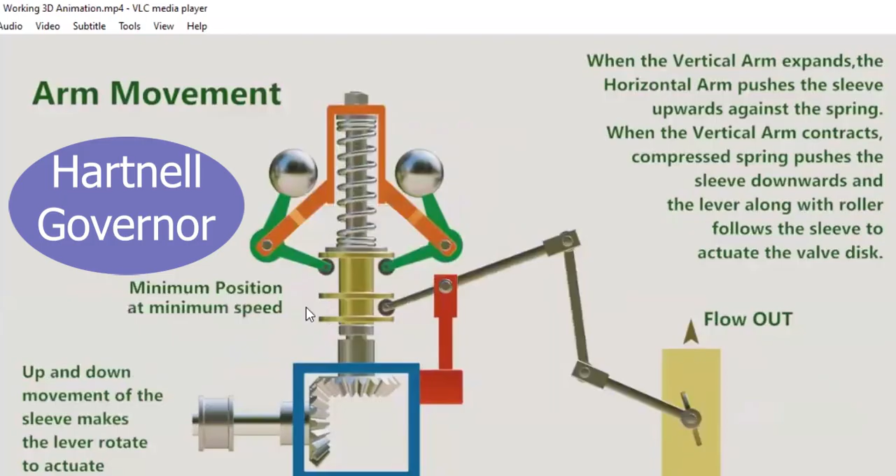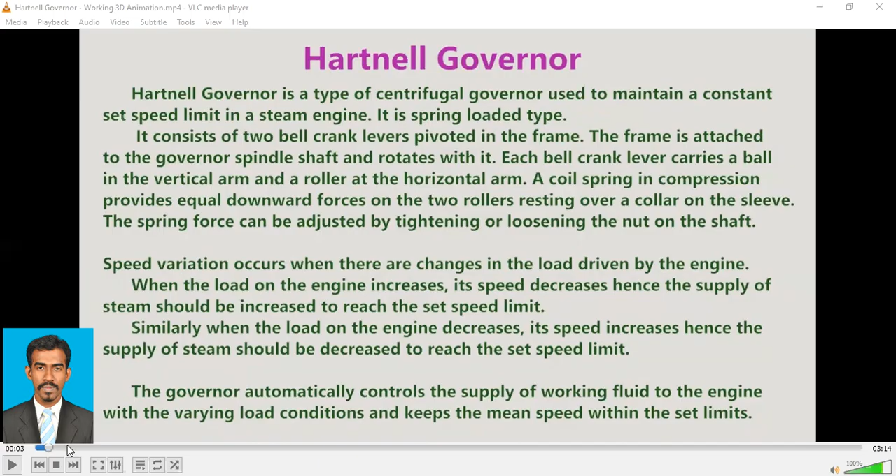This is the Hartnell Governor. It is a spring-loaded type governor. There are two types of governors: one is spring controlled and the other is a dead weight governor. The Hartnell Governor is a spring controlled governor, as you can see there is a spring here, which is why it is called a spring controlled governor.

In this picture we can see the parts of the Hartnell Governor. Here is the frame, this entire part is the frame. Here is the fly ball. These two are the fly balls which will fly outward with increase or decrease of speed. Here is the vertical arm, since it's vertical, and here is the horizontal arm, and here is the pivot.

So imagine what will happen when it moves up, this will come like this. When it moves down, this will come like this. We are going to see it in animated motion. And the roller, these rollers are allowed to move within this region because it needs to move so that it can function.

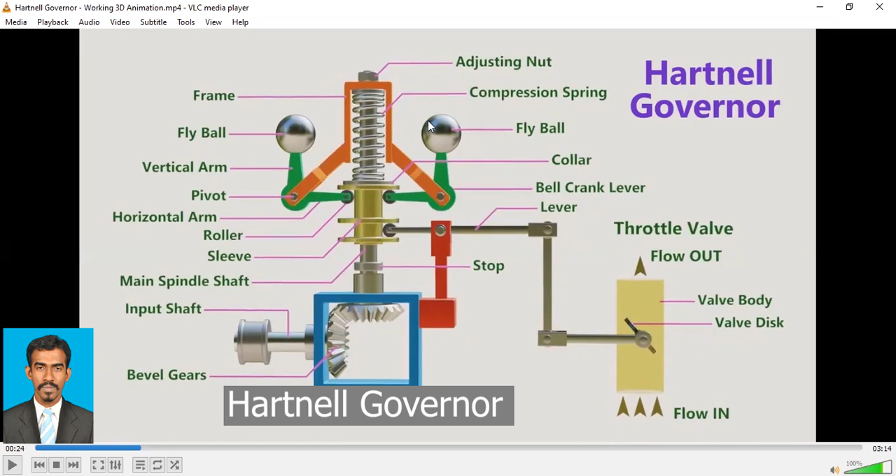Here is the sleeve, this is the sleeve, and this is the main spindle shaft. So this complete assembly will rotate on this main shaft. And this is the input shaft, which is connected to the engine.

Here are the bevel gears. The input shaft, which is connected to the bevel gears, will rotate this assembly. And this is the collar. Here we have a bell crank lever, and this lever is connected to the throttle valve. So the working fluid supply comes in here and goes out here, and based on the motion of this mechanism, this will either open or close to regulate the flow of the working fluid.

There you can see how this functions. When this complete assembly rotates, either this may contract like this or this may expand like this. So this is all the motion of this Hartnell governor. The up and down movement of the sleeve makes the lever rotate to actuate the valve disc, so you can see the motion here will allow this to control that. And here is the maximum position, and this is the mean position.

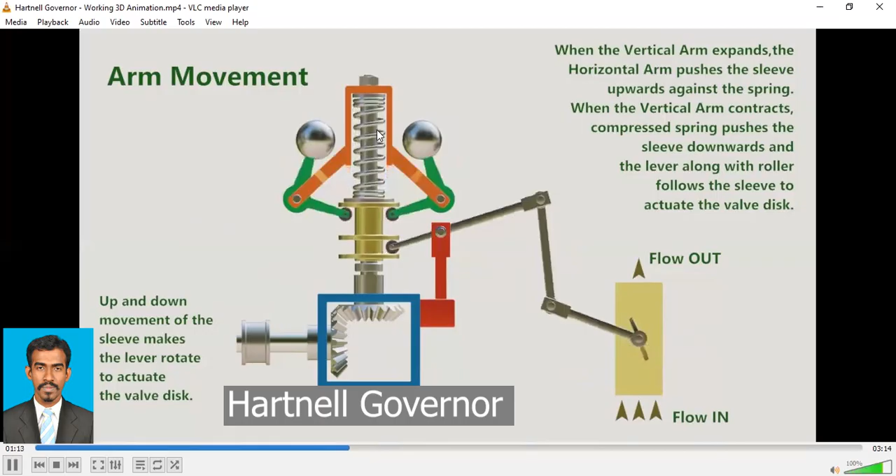And this is the minimum position. So this range between the minimum position and maximum position is controlled by this spring, you can see. This spring is contracted now, now it's a little bit expanded, and when it comes down, it's completely expanded. That's why it is called a spring controlled governor.

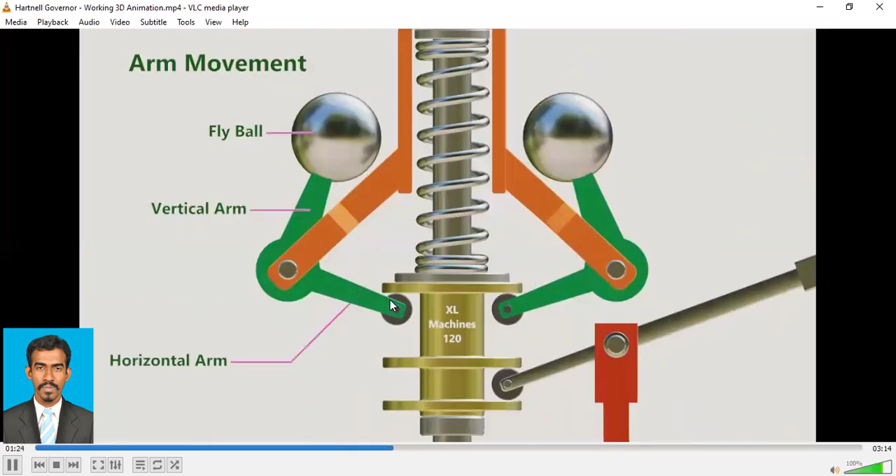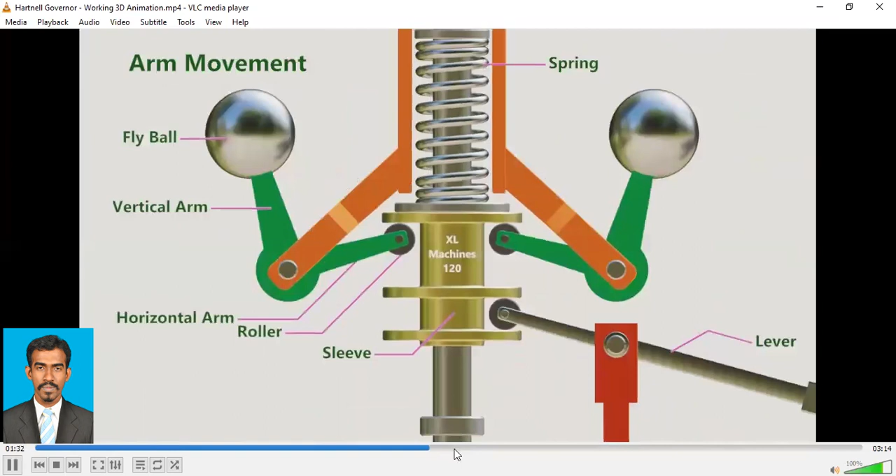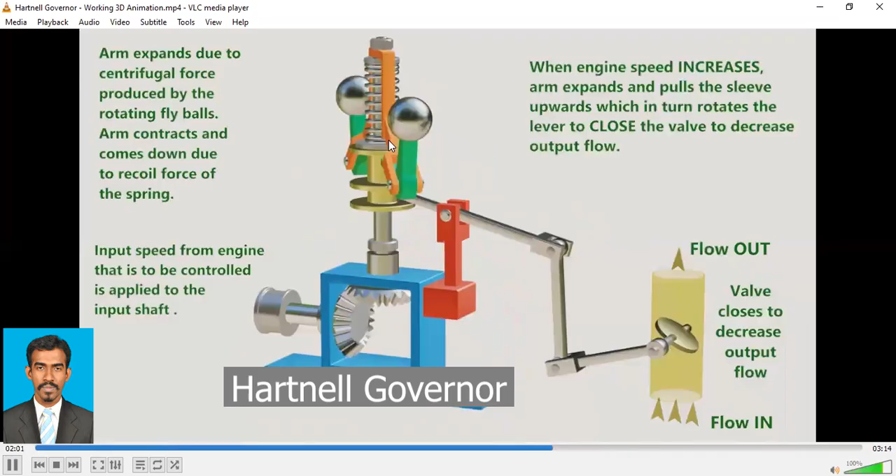And here is our vertical arm, horizontal arm, fly ball, sleeve, and here is our lever, which is connected to the throttle valve. So when you see the actual motion, this also rotates. When the shaft rotates, the bevel gear rotates, when the bevel gear rotates, the sleeve rotates, and when the sleeve rotates, the complete assembly will rotate.

So what's happening? The arm expands due to centrifugal force. When the speed is low, the arms are contracted. When the speed increases, you can see the arms are expanded, this is the expanded position. The arms contract and come down due to the recoil force of the spring, so when this spring recoils, the arms will contract like this. There you can see, now the speed is decreasing and the arms are contracted.

You see here, the arms are contracted, and the spring is in its initial or recoil position. And here is the shaft which is connected to the input speed from the engine. There you can see the functioning of this one.

What's happening when the engine speed decreases? When the engine speed decreases, what should be done? The engine speed needs to be increased. So if the engine speed needs to be increased, what should happen? The flow should be high, which means the valve should open. So what's happening here is the arm contracts and pushes the sleeve downwards.

When the speed decreases, it pushes the sleeve down, which in turn rotates the lever open. At this position, the valve is almost open, which means a much greater amount of working fluid can be supplied.

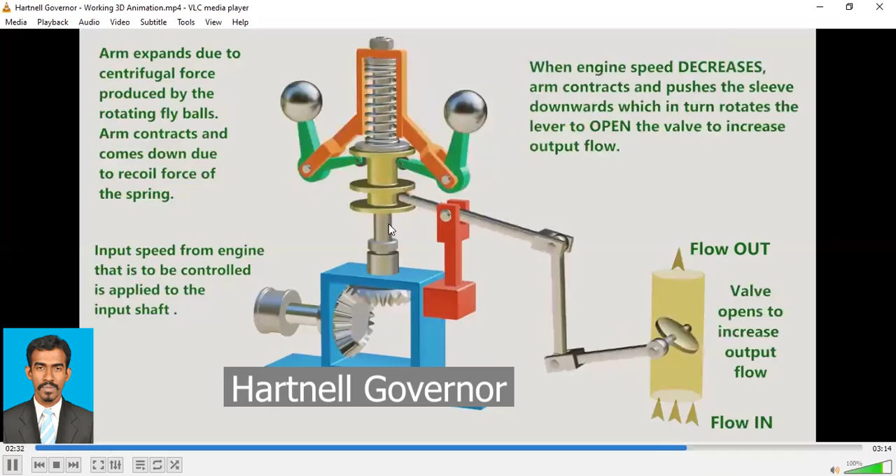When the speed is low, you can see it's becoming low and the valve is about to open. So when it's open, it can supply more working fluid, and then it will increase the speed. So this is how the Hartnell Governor functions, controlled by a spring.

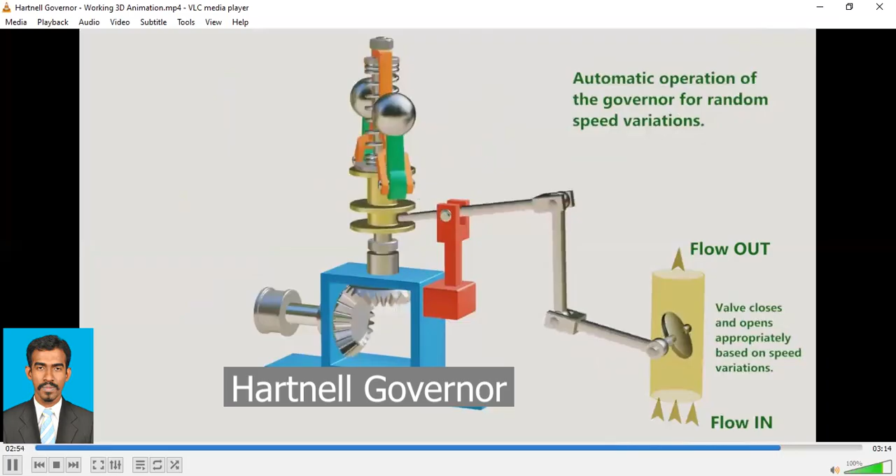Hartnell Governor. A Hartnell governor is a spring-loaded governor as shown in this figure. We have already studied that there were two types of governor: one based on weight and the other based on spring force. This one is controlled by the spring force, as you can see here, there's a spring.

It consists of two bell crank levers pivoted at points O to the frame. Here is a point O and this is another point O - these two are the bell crank levers. The frame is attached to the governor spindle, and therefore rotates with it. Since it is attached to the governor spindle, this will also rotate with the governor while it rotates.

Each lever carries a ball at the end of the vertical arm OB, and a roller at the end of the horizontal arm OR.

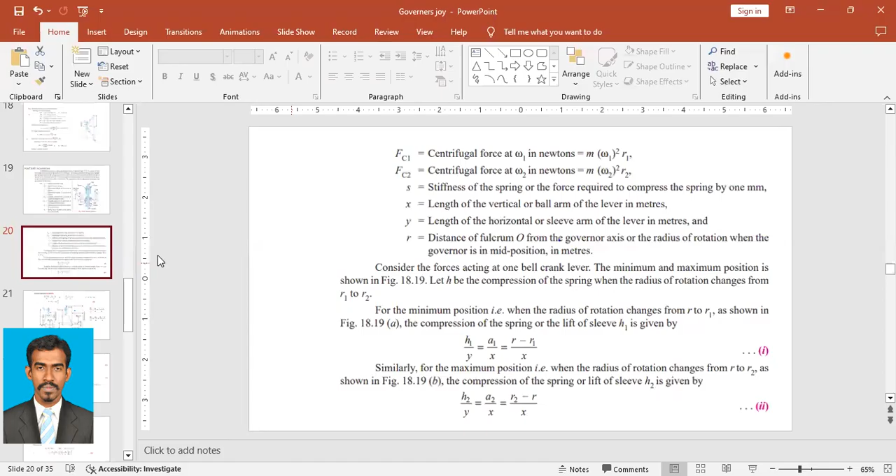And we already know that s2 minus s1 is equal to h into s. Why? Because s2 is a force - as we have already seen, s2 is a spring force exerted on the sleeve, s1 is also a spring force. S is the stiffness of the spring, and h is the length moved, and therefore this is a term, force, having unit N.

So here we have stiffness, that is force per some distance, so force per millimeter, you can say. And here we have a term that is a length, that would be in millimeter. So force per millimeter into millimeter, that will give you force. So s2 minus s1 is equal to h into s.

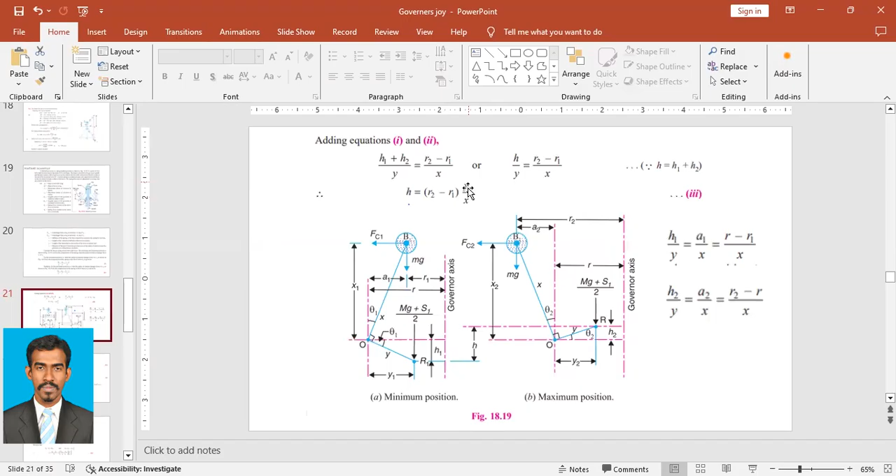And h is equal to r2 minus r1 into y upon x. So we have already found h is equal to r2 minus r1 into y upon x. I'm going to replace this h in the last formula we found, and make s, small s, the subject - small s is the stiffness. So small s is equal to s2 minus s1 upon h.

Small s is equal to capital S2 minus capital S1 upon H. If we replace H with this value, I will have S2 minus S1 into 1 upon H. So if H is equal to R2 minus R1 into Y upon X, then 1 upon H is equal to X upon Y into R2 minus R1.

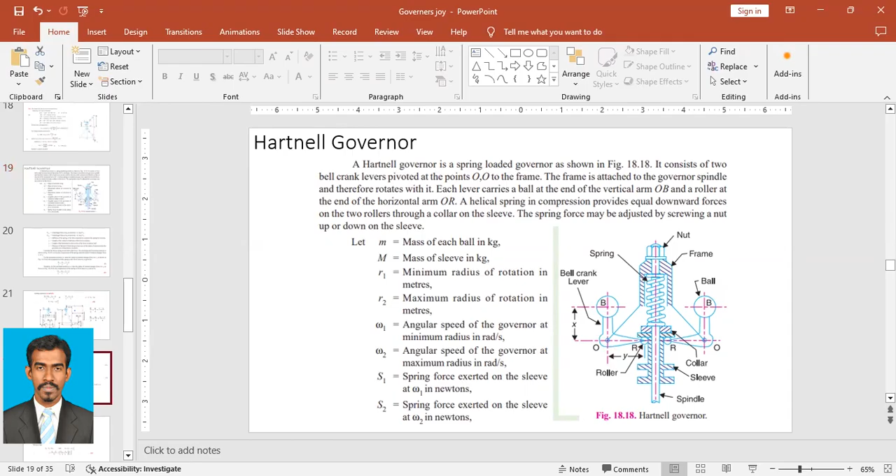So that would be the final formula if we make S the subject. You can make any one of these the subject depending on the question. And therefore, neglecting the obliquity effect of the arms.

So let's see what the obliquity effect is. These arms are rotating, and while rotating they may form some angle. So this X may take different values, X2 here and X1 here, but this change would be so small. Why? Because if I take this as distance X and draw an arc, we know the change would be so small that we can neglect this effect if it is not given specifically in the question.

So neglecting the obliquity effect, x1 is equal to x2 is equal to x. We can consider this length x1 equal to this length x2 equal to x. Similarly, neglecting the obliquity effect of the arms, y1 is equal to y2 is equal to y, not only for x but also for y.

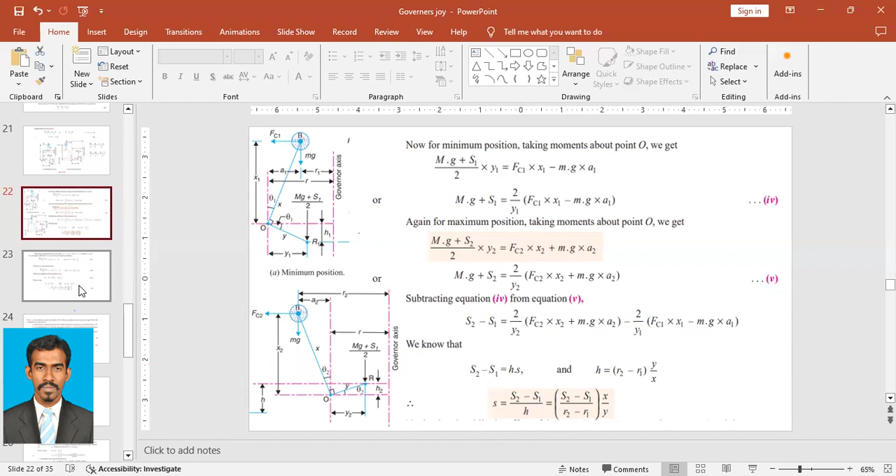We know that s2 minus s1 is equal to h into s. As we have seen previously, s2 minus s1, that is spring force, is equal to distance moved h into stiffness s. So s2 minus s1 can be written as hs, and h is equal to r2 minus r1 into y by x. So h can be written as r2 minus r1 into y upon x.

So if I use these terms in this equation, instead of s2 minus s1, I can write hs. So s2 minus s1 is equal to hs, and I make s as the subject. So s is equal to s2 minus s1 upon h. Instead of this h, I can write r2 minus r1 into y upon x.

So if s2 minus s1 is equal to 2 into fc2 minus fc1 into x upon y, upon this h. This h is equal to r2 minus r1 into y upon x, so h is equal to r2 minus r1 into, since it's 1 upon h, that is x upon y. So we already have an x upon y here by s2 minus s1, and now we have another x by y with the h. So what we'll be having is x upon y whole thing squared.

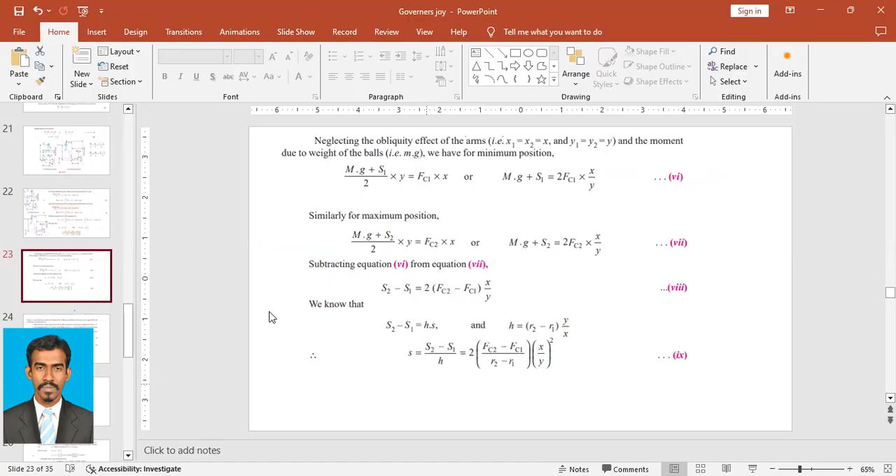So this is a general equation. Based on this general equation, we determine some special features.